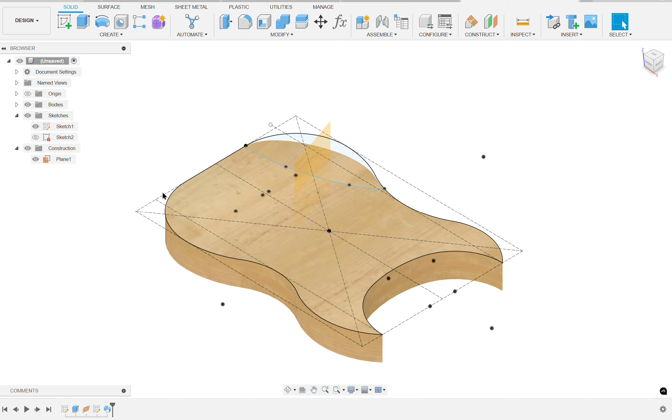Okay, so I hope this helps. I just drew a quick body of a guitar. A little funky looking, but it'll get the job done.

First, you'll want to go to your original body sketch. Mine looks a little something like this. This is going to be the arm cutout profile. You can make it any way you like, it doesn't really matter as long as this is closed off.

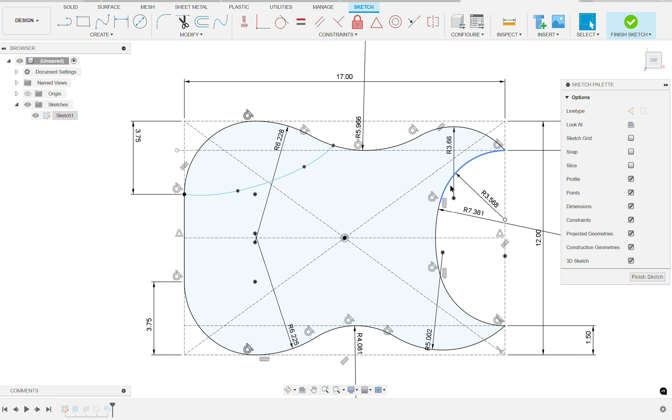You can see how it's somewhat highlighted there, so you'd be able to extrude this. You would just want to create your profile there, and it helps to have your sketches fully defined. In this case it doesn't matter, but for the rest of the operations for creating a guitar, it's really important to have everything fully locked in, all these black lines.

So we'll go back here. And then what I want to do, which I've already done but I'll show you, is construct a plane along a path right here. And then you would select the path that goes across the top of the body. You can move this plane anywhere along that path that you would like.

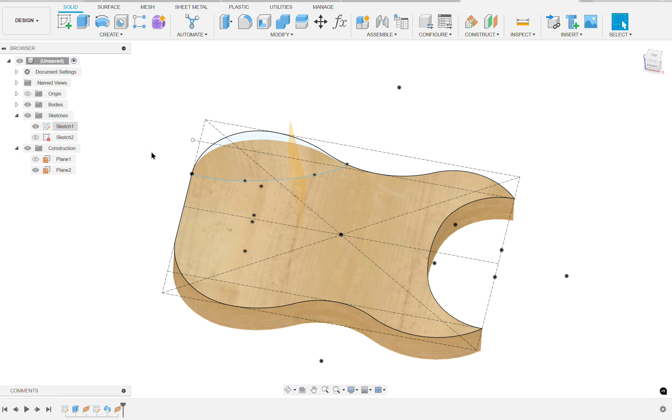Just keep all of this as it is, you don't need to change it. Click OK. And then I'm going to hide that plane and show you the sketch that I had made for this particular carve, and they can look wildly different. But basically, here's the plane that I created.

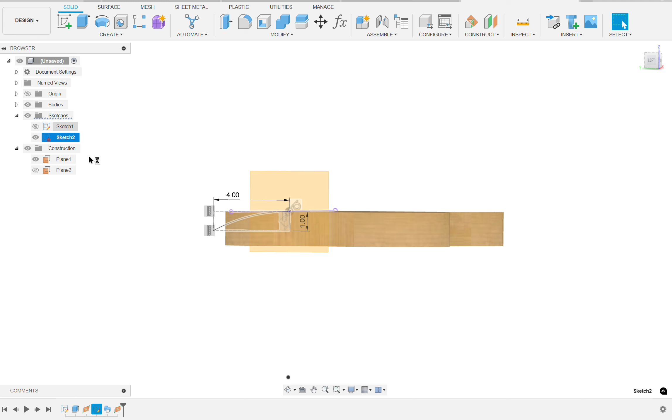You can see it's along that path, and this would be a profile. All I did, and you can have this curve this direction, you can actually add multiple curves with different planes along the path. But essentially, I just made this arc.

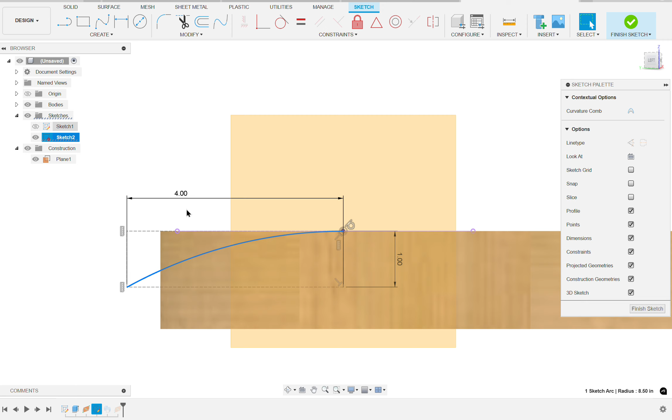I had some construction here for helper surfaces so I can make this curve tangent, and then I just defined these lines as far as how far out the curve that I want to go. But this is all fully constrained, and you can see that here when you have this little red mark that your sketch is fully constrained. But you'll just create that along the path.

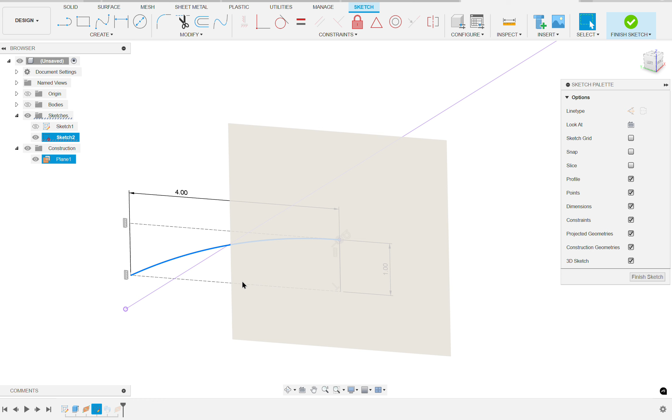It helps to turn off the body, otherwise your mouse is going to want to snap to a bunch of areas you don't want it. Once you have your profile of the cutout that you want, just go ahead and finish that sketch. Turn off the sketches and go to the body here.

And then you're just going to come up here to your sweep command under solids. Hit sweep. You want to turn on your body with your enclosed sketch, that's going to be your profile.

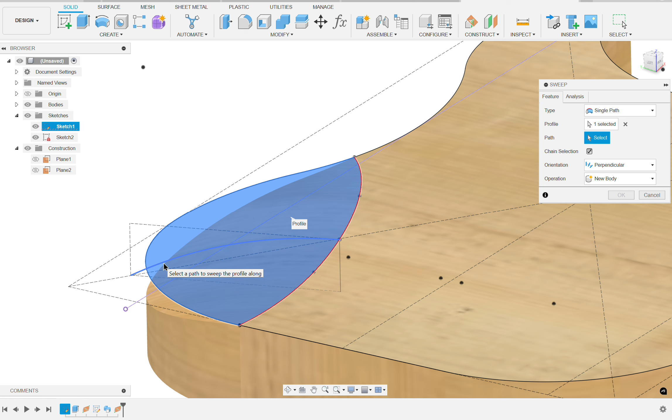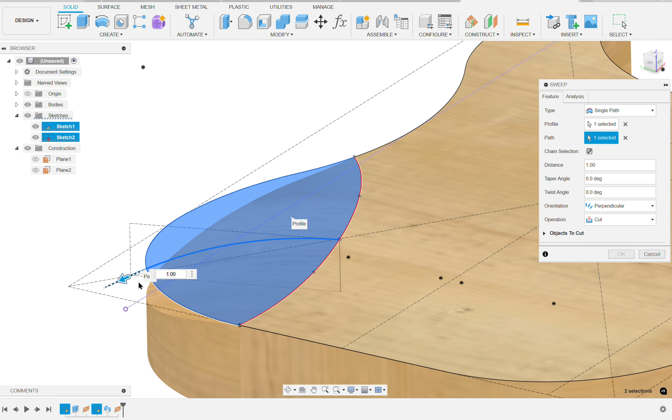And then your path is going to be this curvature that you created, and then you click that. I've already done it, so it's got this really weird shape that it's trying to interpolate. I want it to join it together, but since there's nothing there, it's not going to allow me to cut it. But basically, that's all you're going to do, and it's going to create that relief carve for you.

And you can also adjust how far along this curve you want to go. So actually, I can come back here in the timeline, go before that, and then I'll show you that again.

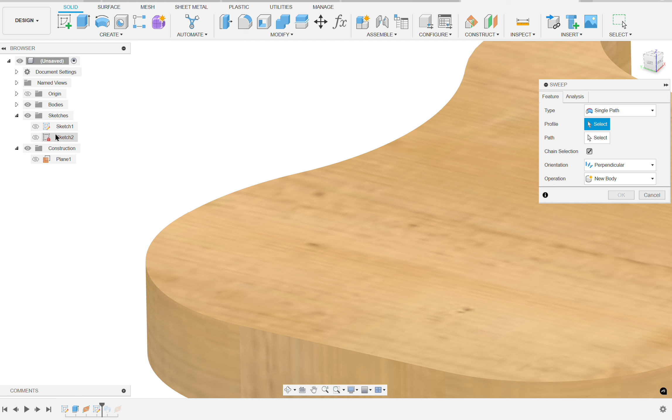Go to sweep, turn on our sketches. This is the profile, this is the path, and as you can see, that's what it's going to cut.

Now again, you can change this into a ton of different variations. You can have multiple paths in this, and there's a whole lot of other things you can do. This is the most simplistic way I've found to make those comfort carves, and that is what I use for up on, or underneath on the belly carve, and then the carves around the neck joint.

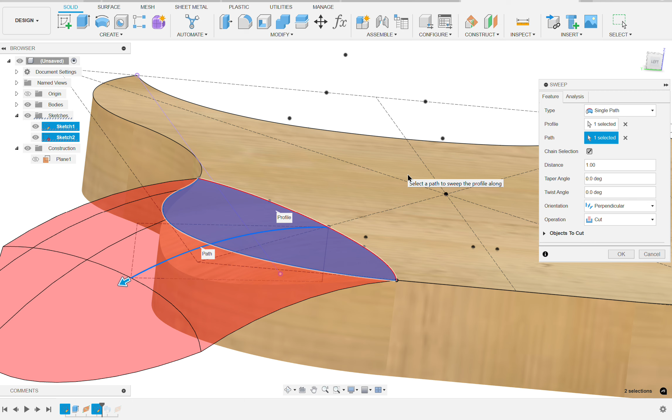So then you can just hit OK and hide your sketches, and there is your carve. And you can go back into your sketches and adjust to kind of get that the way you want it to. But that's how I do it. Hope it helps.